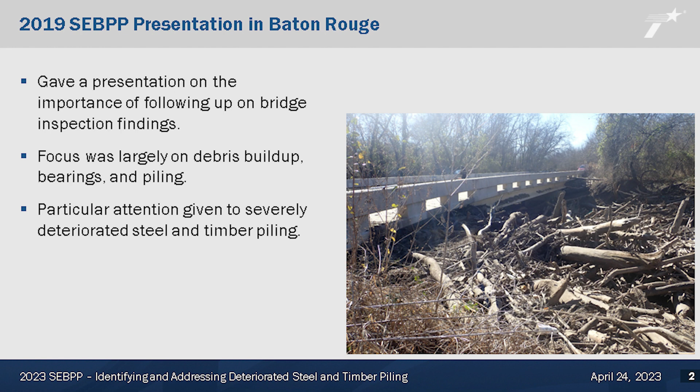Those old timers out in the crowd may remember in Baton Rouge 2019, I gave a presentation on the importance of following up on bridge inspection findings. The focus was really on debris buildup and bearings and piling, with particular attention given to severely deteriorated steel and timber piling and what we were doing. So this is a to-be-continued presentation on where we've landed since then.

We have made a lot of progress, but if you were there in 2019, you actually saw some of these early photos. These photos are from that Baton Rouge presentation. You can see some pretty gnarly looking timber piling there.

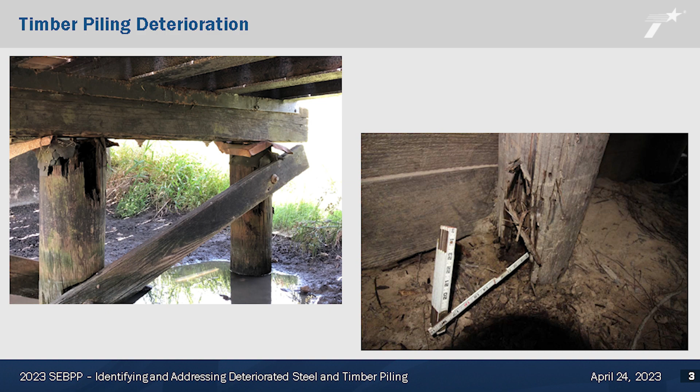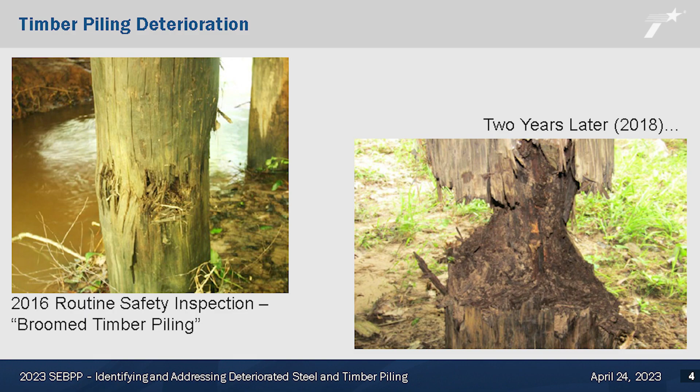This is a good one. So you see the 2016 routine safety inspection, broomed timber piling. Maybe some of you NHI experts can tell me what broomed means - I never quite got that one - but 2 years later, you can see what it did. So that's no good, that's pretty gnarly looking within 2 years. That is not what you want out of your bridges.

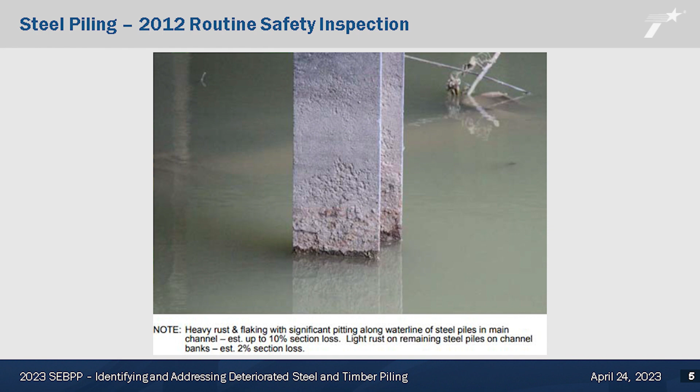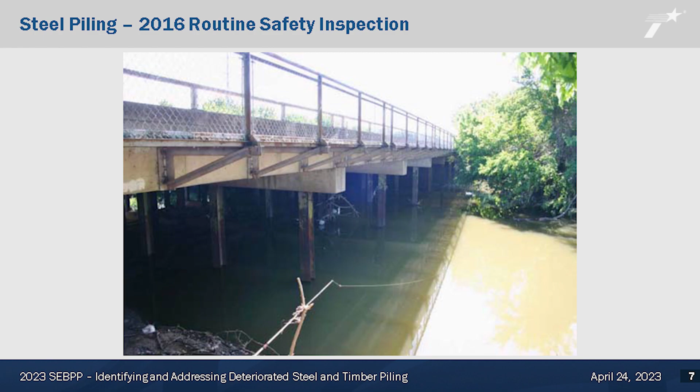In 2016, we're just not going to bother to get in the water at all. The routine safety inspection - they forgot their waders or whatever - so they took a photo for us from the bank. So way to go.

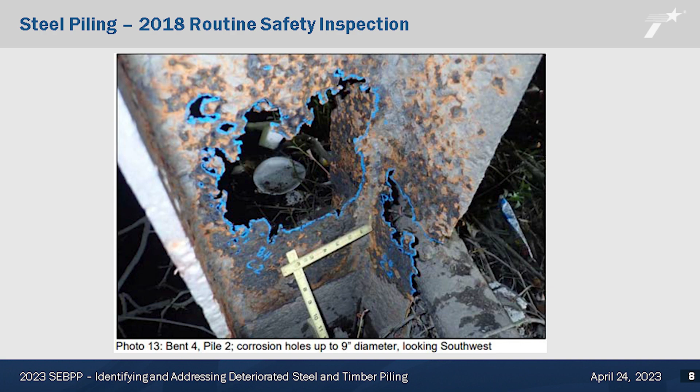All right, here we go. In 2018, it finally dries out and we see what it looks like underneath that water line. And you can imagine this is not what we wanted to see, and this is not an isolated case for that bridge - it happened on every one of the steel piling. This is an urban area, actually just a couple miles outside of downtown Dallas.

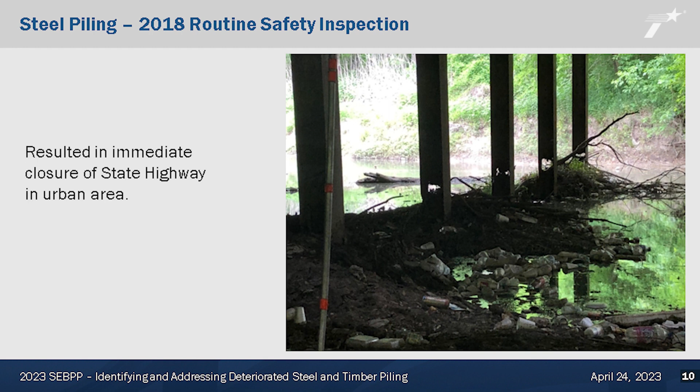We did an emergency closure of this bridge - not what we want to have happen, right? This bridge was talking to us for a long time, and we weren't listening. We weren't doing thorough enough inspections. Just because it wasn't programmed for underwater doesn't mean you shouldn't be getting in there and seeing what was going on, so that's no good. Here's from a different bent, so this was widespread within the bridge.

So now that we're sufficiently freaked out, what do we do about it? This one really, truly did get our attention back in 2018. Our statewide bridge program manager, bridge inspection program manager, sent out an email to basically everybody that has anything to do with bridge inspection - internal, consultants, the districts, everybody - and reset a number of things, including what our expectations are on these kinds of situations where there's some water but not a lot of water. We said you really need to get in there and truly inspect those. So whether you're using waders, watercraft, whatever, we don't care, but you got to get in there and look at it.

And that sounds obvious, but this wasn't the only case where this didn't happen. We were seeing a number of examples where if there's just a few feet of water, it's not programmed for underwater inspection. We were not getting in there and doing a thorough enough inspection below the water.

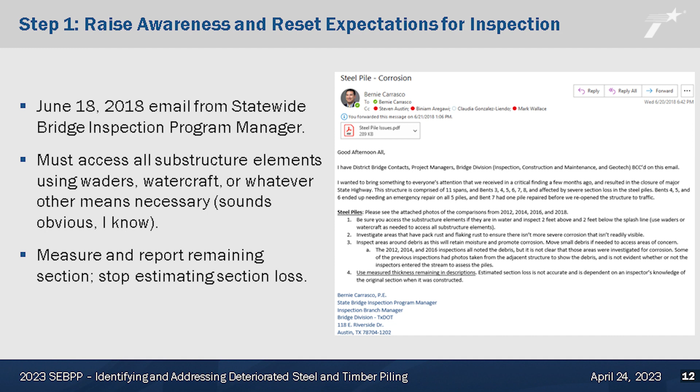We also wanted to measure and report remaining section and stop estimating section loss. We were seeing a lot of estimated section loss that wasn't even remotely accurate.

So this went out on June 18th, 2018. Six days later, I guess this is the equivalent of knocking on wood, or I don't know if we can see the future or what, but this happened. You can't see a whole lot here, but you can certainly see that bump in the road. If you're really bored tonight or need some help falling asleep, go back and look at my Baton Rouge presentation, it's online. I've got a video of a couple of cars going over this thing, and the way we found out about this was because we got several calls from the public saying, hey, your bridge is a roller coaster today. It wasn't yesterday.

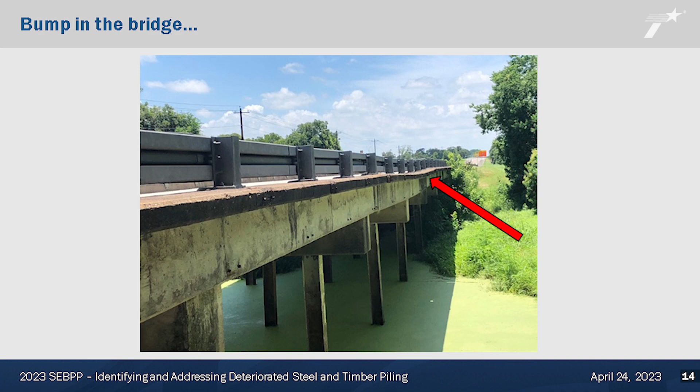You can see that really nasty looking water in the creek there. So we closed it immediately, and the phone call came in early that morning, and as we were sitting there scratching our heads trying to figure out what possibly could have happened, we had a little time to think about it while getting the dewatering stuff out there, and we thought it had to have settled. Like, why would this have settled? Because it's got to be settled, man. It couldn't possibly have buckled. We couldn't possibly have buckled steel piling.

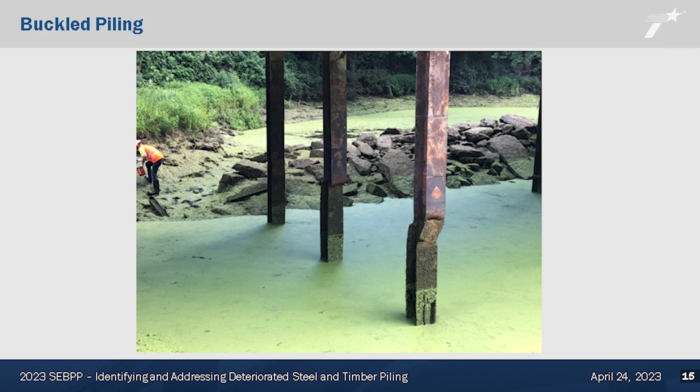We got buckled steel piling. This one scared me to death. It still scares me, I lost a lot of sleep over this one. This is as close as we've ever come, as far as I know, to actually losing a bridge, not because of a flood or a truck impact or something like that, just through sheer deterioration, corrosion. This is the closest call we've ever had. And thank God it's a continuous span over this, or else I don't know what would have happened if it was a simple span.

So anyway, we were already paying a lot of attention to this, and then this happened, so we went up to an 11 in the response, and really in what we're thinking.

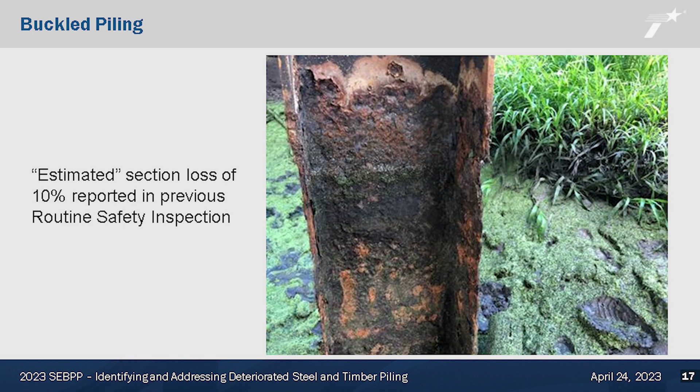So back to the estimated section loss. We had the previous routine safety inspection, we had an estimated section loss of 10%. So you can see there, pretty obvious, right? It's way, way, way more severe than that. And I think this was another case where we had just enough water to be a problem, but not enough to get us an underwater inspection.

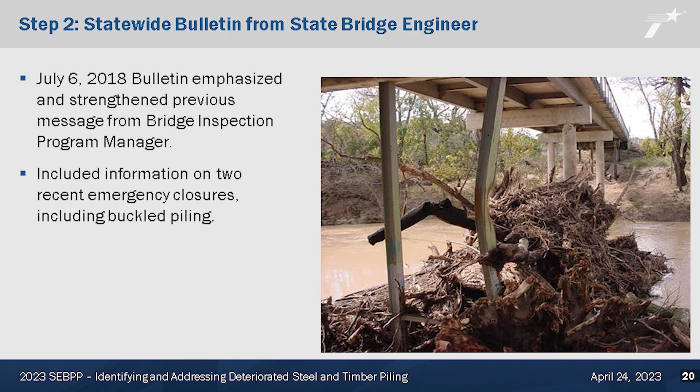So, step one was a bridge program manager sending out something. Step two, very quickly after that, less than a month later, the state bridge engineer, my predecessor, sent out a bulletin, a more formal bulletin, emphasizing and really strengthening the previous message from the bridge inspection program manager. We included information on those two closures, the one in Dallas and then the one that I just showed with the buckled piling. And I really wanted to clarify expectations of inspectors with some significant additions on what we communicated in the past.

And we want to add a requirement for underwater inspection, even if there's only 4 feet of water, we want an underwater inspection. If there's any debris blocking you from getting up and doing a close-up inspection, we want that reported as an urgent finding, meaning that we want the debris removed and we want to get back out there within 6 months and perform another inspection. We can't use debris as an excuse for not getting out there and looking at it.

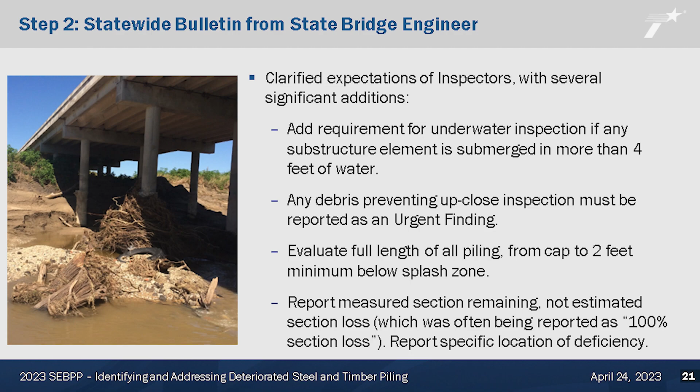We also want to evaluate the full length of the piling from the cap to 2 feet minimum below the splash zone. And here again, this bottom bullet, reporting measured section remaining, not estimated section loss. We were saying over and over again, 100% section loss. That really doesn't mean anything, all section loss is 100%, right? So we want to know how much remaining section we have.

So, you know, you guys have all seen this. We're not doing rocket science here. Just take whatever tools necessary you need to measure remaining section and stop looking at something and saying, I don't know, 10%.

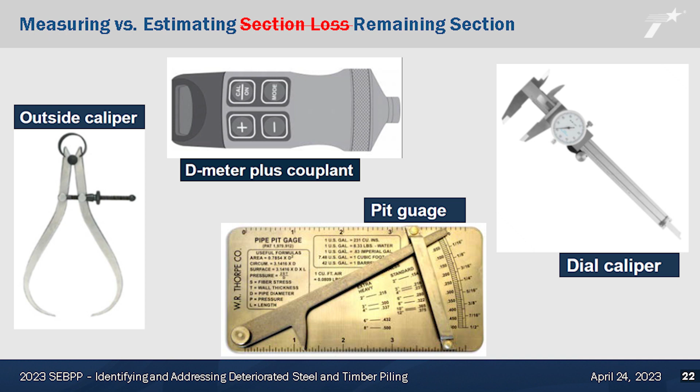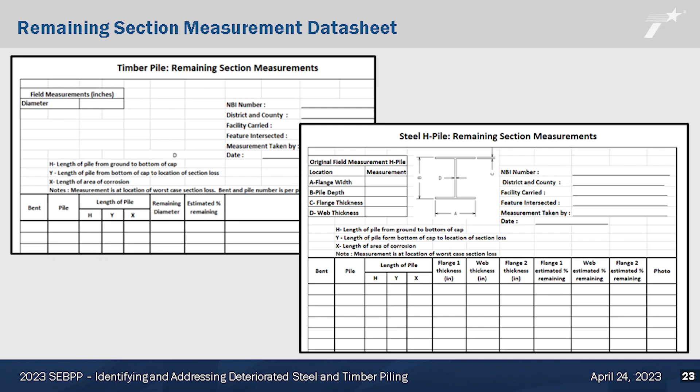We created some forms, too, that we wanted the inspectors to use to make sure we were getting accurate information. So step 3: identify all deteriorated steel and timber piling statewide, July 18th.

So you may get a sense of just how seriously we were taking this. The first bulletin from the inspection program manager happened in June. We were moving very quickly at this point because that buckled steel piling really got our attention big time.

So we really wanted to start cataloging all deteriorated steel and timber piling across the state. We included on and off system. We really didn't care about ownership. We weren't treating this as a maintenance issue, we were treating this as a safety issue. We just wanted to look at what needed to be done, and if we needed to work with local governments, so be it.

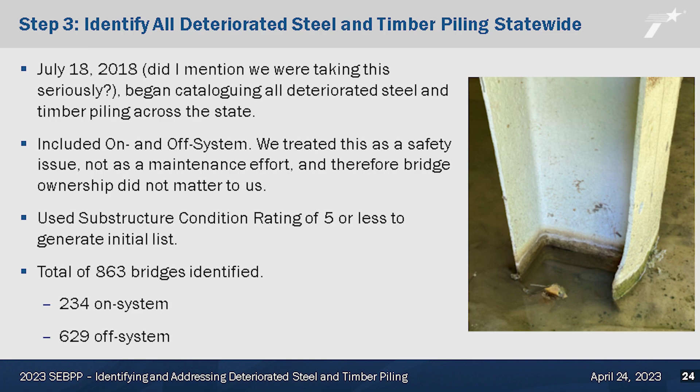We used a substructure condition rating of 5 or less to generate the initial list, and what you can see there is our first list was 863 bridges identified, the majority of those being off-system, but a good number of on-system as well.

All right, step 4. This was a fun one. I'm glad this wasn't me, but now it was bridge folder review time. So you take those 800 and whatever bridges and literally pull the folders, the inspection folders, and start going through every one of them one by one.

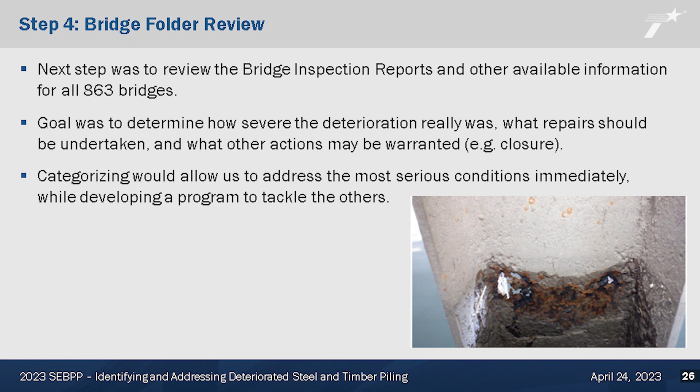The goal really was to determine how severe the deterioration really was, because what we were finding was inspectors could have or should have found severe deterioration that was not reported as a critical finding, something that we need to step in and do something pretty quickly. So that last bullet, that's what that really allowed us to do.

It allowed us to address the most serious conditions immediately, while at the same time developing a program to tackle the others. And our moderator of this session has been responsible for that effort. So really, he should be giving this presentation.

And so that was what the initial effort allowed us to do, is go and find the ones that could have been a problem. All right, step 5. So now we've got all the information, what do we do now? We formed a working group, and we got to it.

So we wanted to move to implementation, right? We didn't want to just keep on checking folders and data and things like that. So we really wanted to move on this. So we met monthly to kick things off.

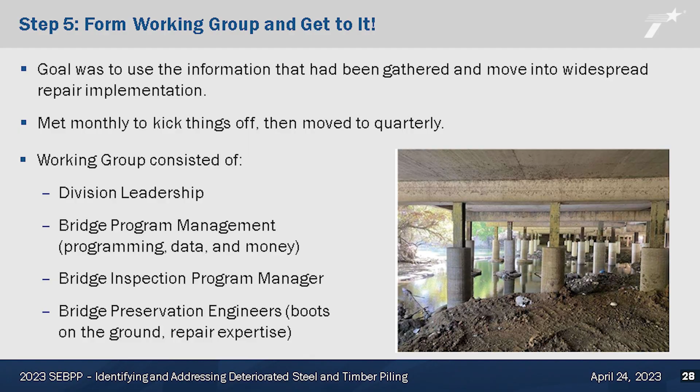The working group consisted of lots of different folks, a big cross-section within the division, because we did want a lot of input on this. The bridge program management, they've got the programming, they've got the data, and most importantly, they've got the money. Our bridge inspection program manager, of course, and some of his staff, and then the bridge preservation engineers. They got the boots on the ground, and they got the repair expertise, what really needs to be done on a bridge-by-bridge basis to address this.

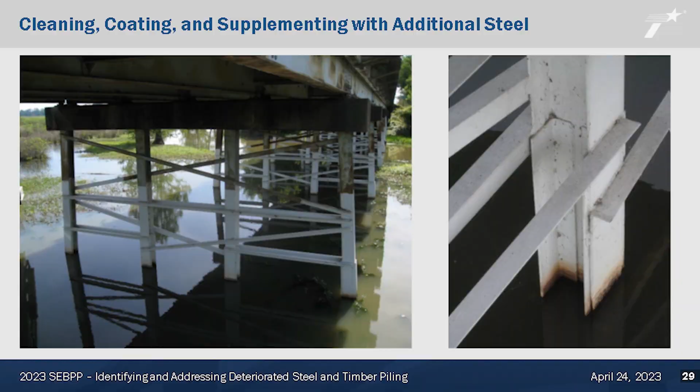This is actually an older photo, I took this long before any of this happened. It shows what we used to do a lot of, and that was cleaning and coating and welding on steel plates. This is good, it's effective, it works fine. So we still do some of this, not as much as we do this, though.

Concrete encasement we have found to be very, very effective. It's very quick, it's very, very inexpensive. We really like it, and in terms of moving the needle, it's a great way to do it. So here's an example of a substructure.

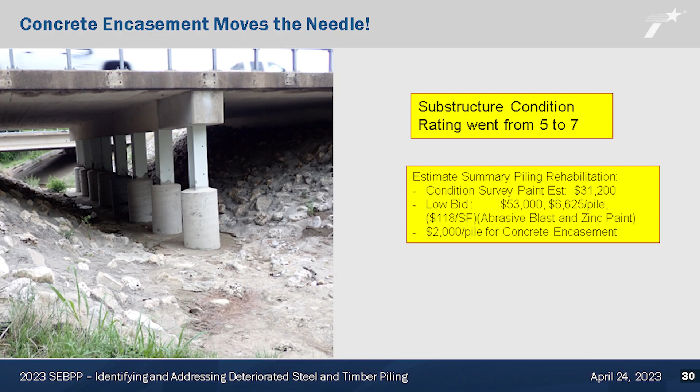The condition rating went from a 5 to a 7. You can see the cost there, $2,000 per pile. That's peanuts in our world. You guys involved in the plan development side and bidding for bridge rehab projects know $2,000 is nothing. So the idea that we can get an entire bent done for like 10 or 15 grand is terrific.

Here's another one. You can see on the left what it looks like, and on the right, this project is actually underway now. It's currently a 5. We fully anticipate it'll be a 7 when we're done. Here again, $1,700 per pile, peanuts.

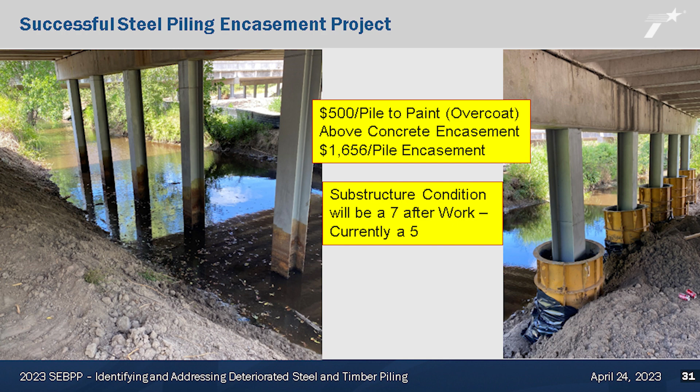I hope Robbie's in the room for this next one. The video he showed this morning, his underwater supervisor talked specifically about this issue, where you've got the concrete encasement, and they would go underwater to see if they actually did what they were supposed to do. He would not be pleased to see this, just like we weren't pleased to see this. It really doesn't do nearly as much good if you don't get down below the ground line.

So this one was a miss, total fail here. We got the condition rating from a 5 to a 6, but how much good did we really do? We probably helped a little bit, but we got a stubby little piece of concrete that I don't think is going to last us long. So not only did you do a cruddy repair, now you've made it a lot harder for us to go in and do a good repair.

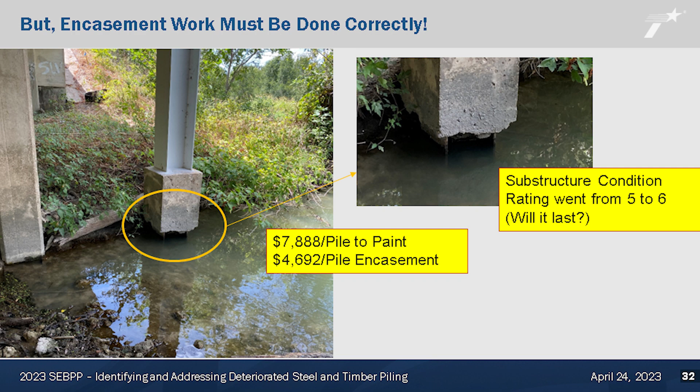And you can see this one actually starts getting up there in price. This is close to $5 grand a piling, and far and away the worst job that was done of the examples that I gave.

Okay, and we're going, right? And Don talked a little bit about this - the clock doesn't stop. Just because we started an initiative doesn't mean that bridges stop deteriorating. We don't stop having problems. So there's always new bridges being added to the list.

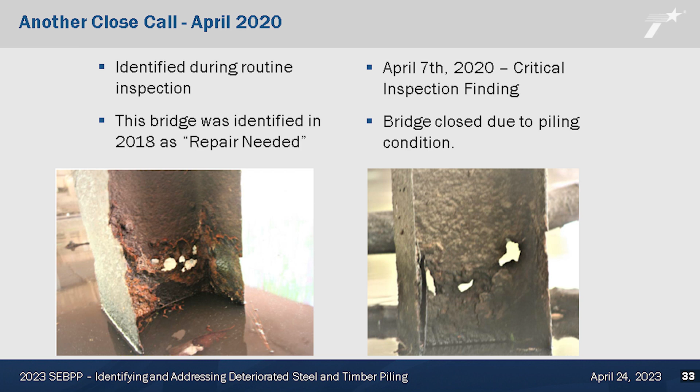And sure enough, we had another close call in April of 2020. This was identified as some corrosion during the routine inspection. The 2018 inspection report said repair needed. I agree. April 7th, 2020, so two years later, this did turn into a critical inspection finding. The next inspector took it much more seriously than the previous one did, and we closed this sucker.

We don't really mess around with these anymore. When we see this kind of deterioration, we get it closed. Just to show you a little bit of progress, this is as of May 2020, about two years after we generated that initial list.

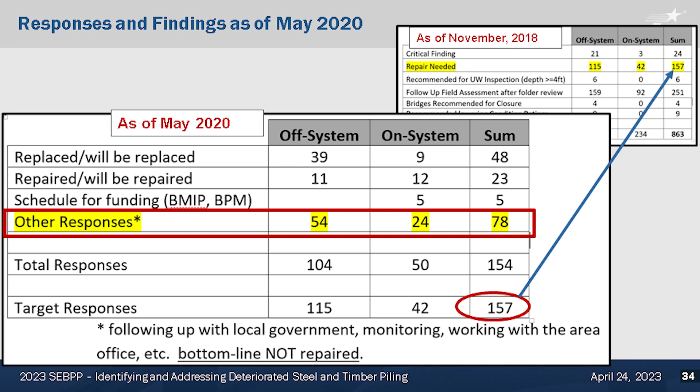So I mentioned 157 bridges that needed to be repaired. We hit about half of them. That's good. We would have loved to have hit more, but we got about half of the ones identified. So we're cranking on these, right?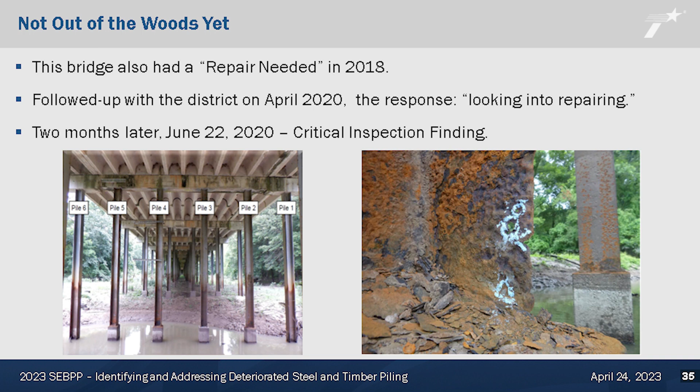We did follow up with the district in April 2020. The response was they're looking into repairing it. Two months later, it turned into a critical inspection finding. I can't remember if we closed this one or not, but it really just highlights again that we got to take these things seriously, and we got to act quickly. Once you start deteriorating to that level, things do progress pretty quickly.

So, updated list: steel and timber pile assessment, June 2020. We generated a new, updated list of bridges with steel and timber piling substructure rating lowered to a 5. These are bridges that we've added to the list. Again, kind of back to what Don was talking about with the poor bridges - there are always new bridges coming onto these lists. So 53 and 129 is what we'd added since our initial list. That's a lot of bridges coming on a regular basis.

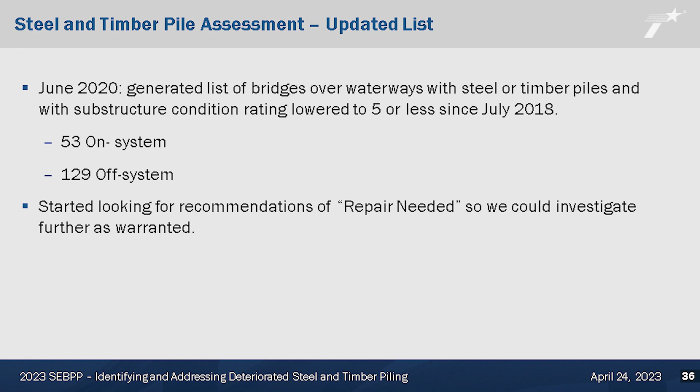We started specifically looking for these recommendations of repair needed, so we could really dig into those and find out, okay, was this another case like that other one that it really should have been a critical finding?

This presentation was supposed to be about steel and timber piling, but it's been all about steel piling. Our approach to addressing deteriorated timber piling is a little different, a little more simple.

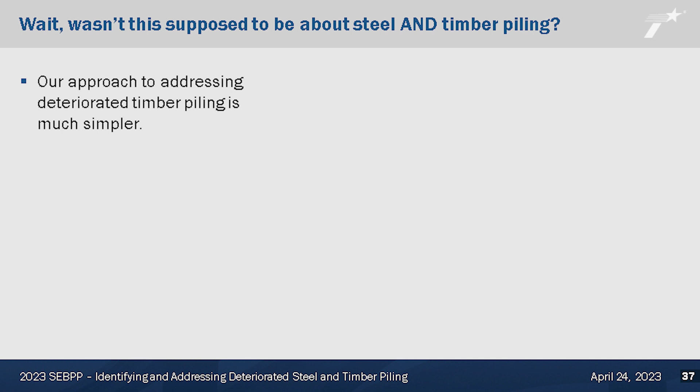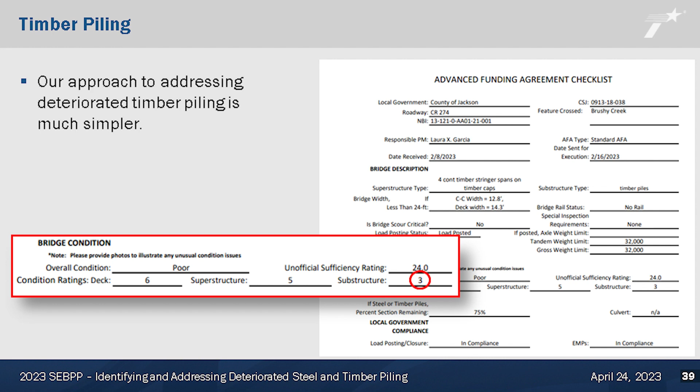Here's a screenshot of an advanced funding agreement I just signed a couple weeks ago. You can see it's timber, and the substructure rating is a 3. There's a photo of it, with a note: 75% decay loss.

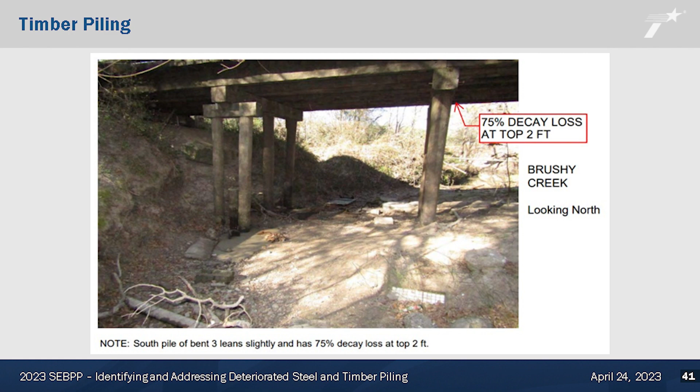We don't really think about this one too much. What do we do? We replace it. We've got a lot of these older bridges, especially off-system, with timber piling. When we start seeing notes like 75% loss, we just replace it.

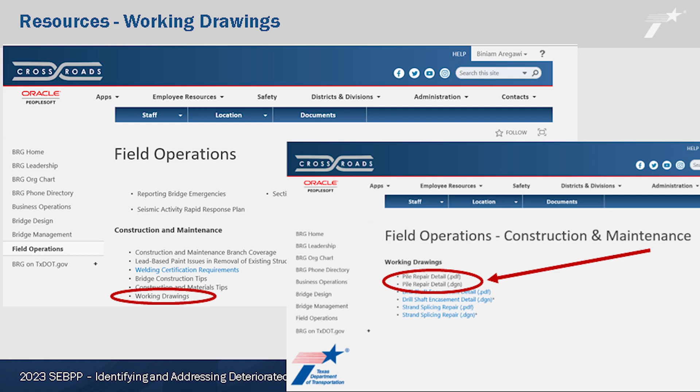Something Stephen and his group have done a lot of work on the last couple of years, with a lot of progress, is developing working drawings. Stephen has given presentations on our effort in developing these, but one of the first things we did was develop working drawings for this pile repair detail.

I think you're probably getting the message: we really like concrete encasements. They're fast, inexpensive, and effective. On this sheet they gave a few different options on how to do it. It's not rocket science, this is really pretty simple.

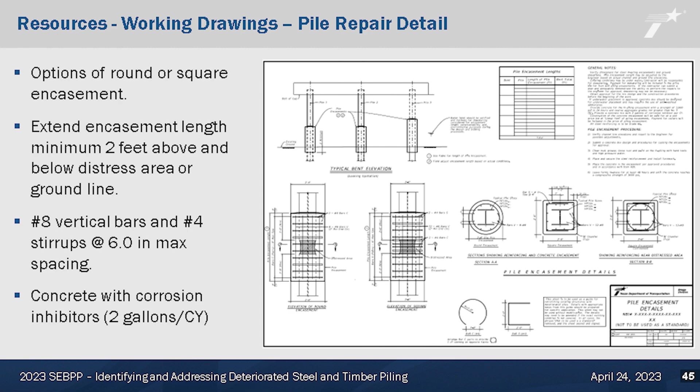We beef it way up with steel, with a lot of reinforcement in there, and throw some corrosion inhibitor in the concrete. The second bullet: extending the encasement length minimum 2 feet above and below the distress area or ground line. We really don't want that circumstance where the piling doesn't go down to the ground, like that photo I showed where it stops short.

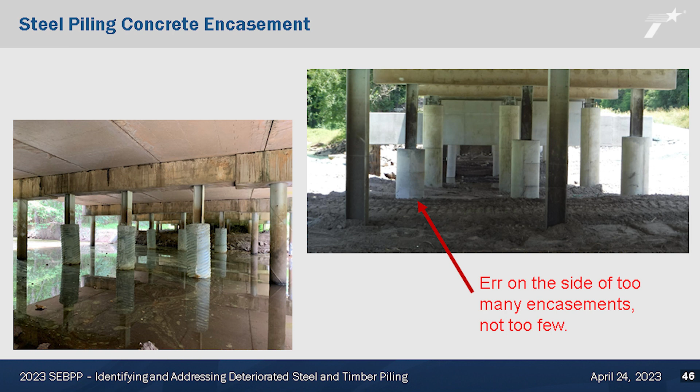Just a couple more photos here. Here's some more successful concrete encasement, and the arrow on the right—err on the side of too many encasements, not too few. Something really interesting about that bridge with the buckled piling: some of those steel piles had concrete encasements, but clearly they did not go far enough in adding those. It's really inexpensive, so just put more than you think you need. Channel shift, water shifts, so do it everywhere, while you're there you might as well.

Last couple of examples here, one more before and after—really slick, really easy, fast, and effective.

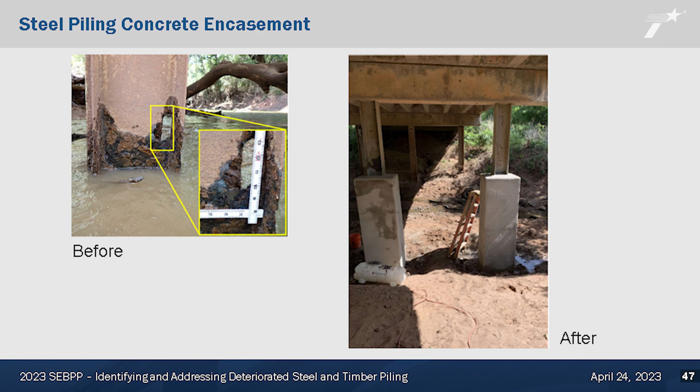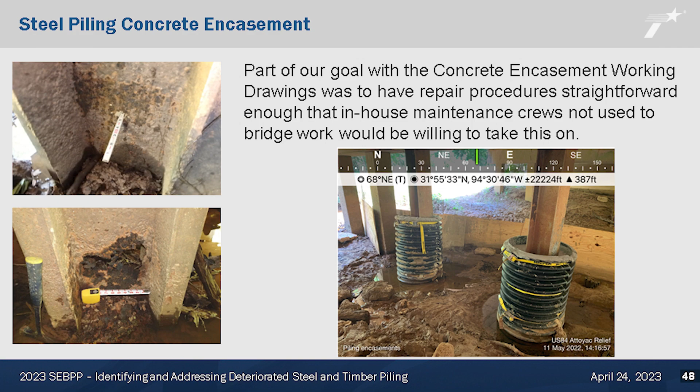Part of our goal with this—we do rely a lot on contractors, but we're also really trying to up the game in the amount of in-house work we've done. We've heard presentations at this conference about what Arkansas DOT and Louisiana DOT do, and they've got a lot more in-house capability than we've had. So we're trying to increase how much work we do internally, because it's a fraction of the cost and much, much faster. That's one of the goals of the working drawings: keep it as simple as possible so our maintenance crews are willing to get out there and do it themselves.

I'm going to go quickly through my last couple slides. Current status: every couple years we're updating our list. We started it in 2018, updated it in '20, updated it in '22, and we'll have another update next year. We're really just trying to continue getting the message out, making sure everybody understands how important this is. This is not something that can be ignored—we can't lose a bridge, we've got to be better than that.

Did y'all see that? Or cancel that—I'm going to hit cancel. Oh, shoot. Well, y'all can still see the presentation. All right, sorry about that.

We want to integrate this into our database, and we want to stop having to do this by hand. We will keep doing it by hand as long as we need to, but we've got our data wranglers more involved in this process now.

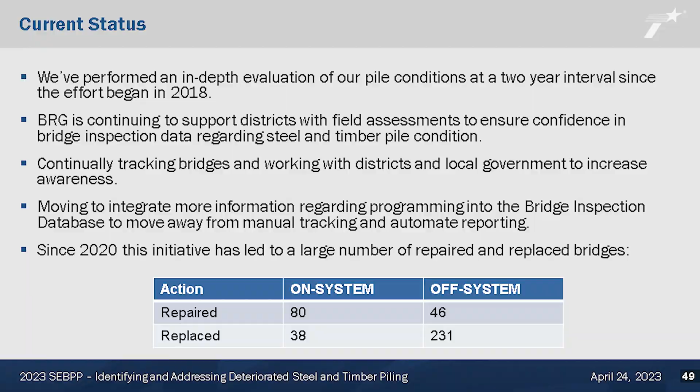Really, just to show you that bottom number there, we have addressed a very large number of bridges as a result of this effort. So we've repaired, golly, I'm not going to try to do math in front of everybody, hundreds of bridges have either had that encasement, so primarily either had the encasement or been replaced.

I'm not going to go off on a tangent here, but I really enjoyed hearing Don's presentation this morning on the bridge replacement program, because in my opinion, replacement is a huge part of bridge preservation. Really taking a step back and trying to figure out where does it make sense to preserve versus just replace that sucker, and you can see where we land on that. We replace a lot of these bridges.

Takeaways: one size does not fit all. Same point, you've got to look at this on a bridge by bridge basis. There is no one size fits all. I think you've heard me say it about a dozen times, I'll say it one more: concrete encasement is awesome, we love it.

Go with the change orders. Within Texas, it just for a while, it seemed like if you got a change order on your project, then you were just a miserable human being, like you had screwed up bad. Like in these kinds of projects, change orders are reality, so just accept them and don't fight them, because if you fight them, you're not going to get the work done.

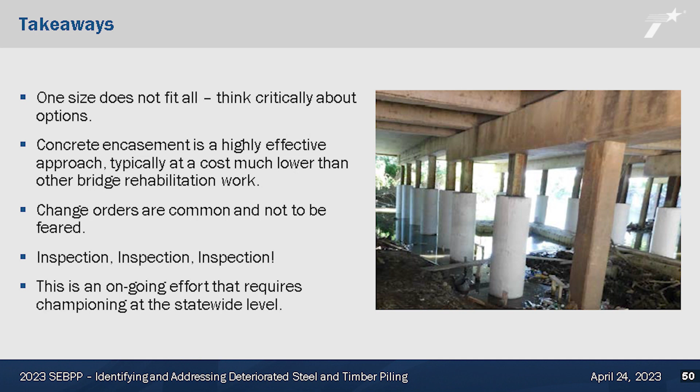Inspection. Avoid that failure of a project that I showed you where the piling didn't even get to the ground line. It's hard to get inspectors out to jobs right now, especially on these smaller dollar ones, but if you don't inspect it, that's the kind of quality you can expect.

This is an ongoing effort that requires championing at a statewide level, so we're going to keep getting the message out, and that is it.

TxDOT shifted repair recommendations from paper forms to the maintenance module through the inspections. Have you seen that make it substantially easier to respond and or track situations like this, to get those numbers down and get them down quicker? Yeah, absolutely. You're kind of stealing my thunder for the presentation that I'll give tomorrow, but yes, absolutely, the maintenance module has been a big part of it.

So Graham, yeah, we're same in Georgia, we like encasements, like to not do them after the fact, but same as you. One thing we're seeing too, I was wondering if you see it, we're seeing some instances where it's at the top of the pile, where you got the cap and the H pile, you get corrosion there. Are y'all seeing that? Not too much. The most common factor for us is that 2 or 3 or 4 feet of water, so stuff that is wet and dry over and over again, it's not getting underwater inspection, it's just kind of in the muck. That's really probably the most common factor for us. We haven't seen a whole lot of deterioration towards the top.